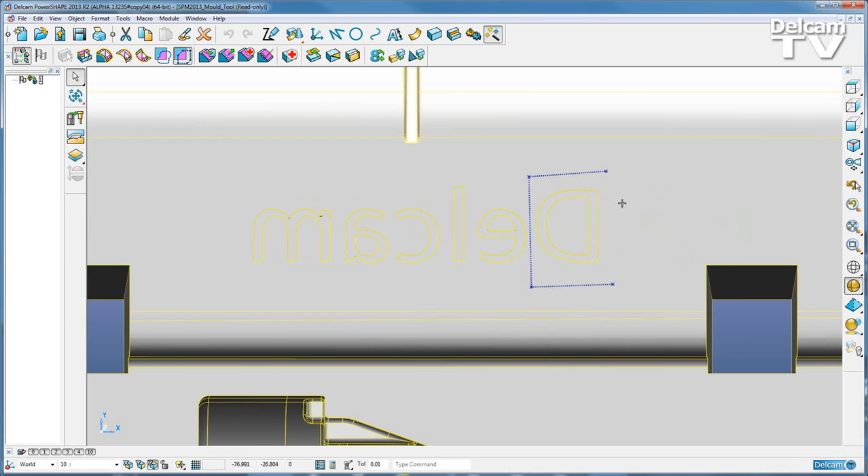In this first example, we're just going to come in and create an electrode around this single letter of a logo. Go straight into our solid core, just do a straightforward solid core capture of this.

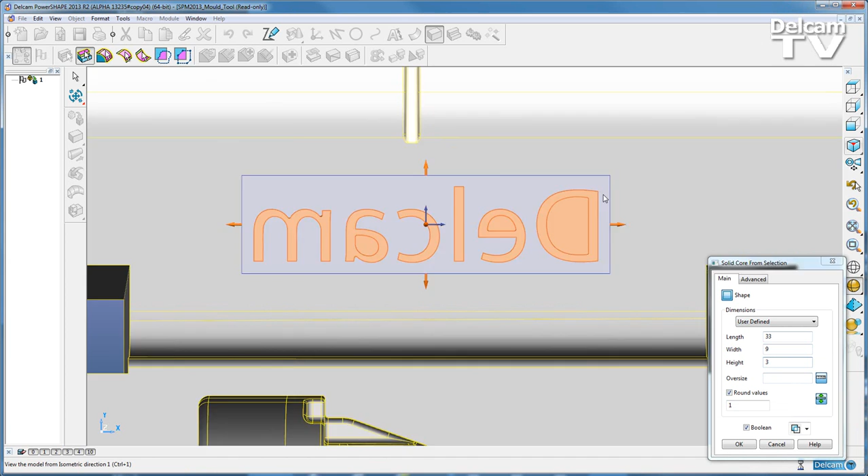But upon reflection, I can see I could probably get all these letters in. So what I can do now is just hold down the Shift key, and just add these extra letters now to this electrode. Then what we'll see is the solid core area automatically updates to include these new additional letters for this electrode. I can now come in, just do a manual alteration here, just increase the height slightly. When I select OK, what we'll see now is that whole electrode core area has been captured.

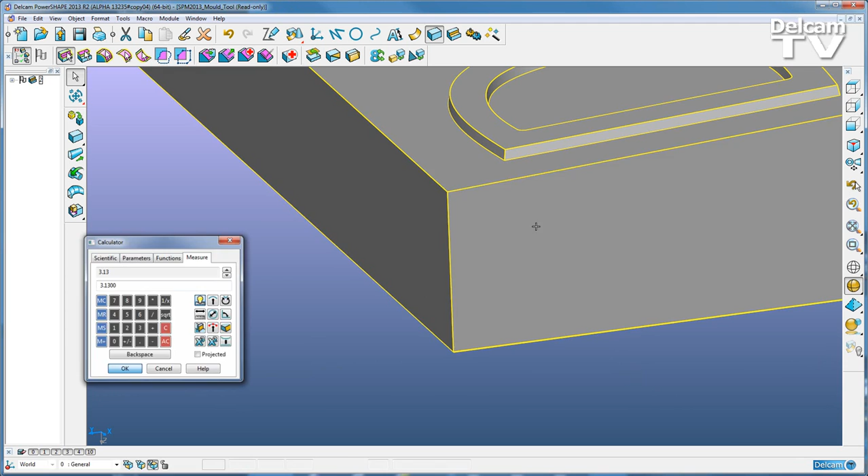I'm just going to apply some clearances to this. So I'm just going to come in now and just use some straightforward measuring tools. Just measure between these 2 points here. I can see the distance is 3.13 millimeters.

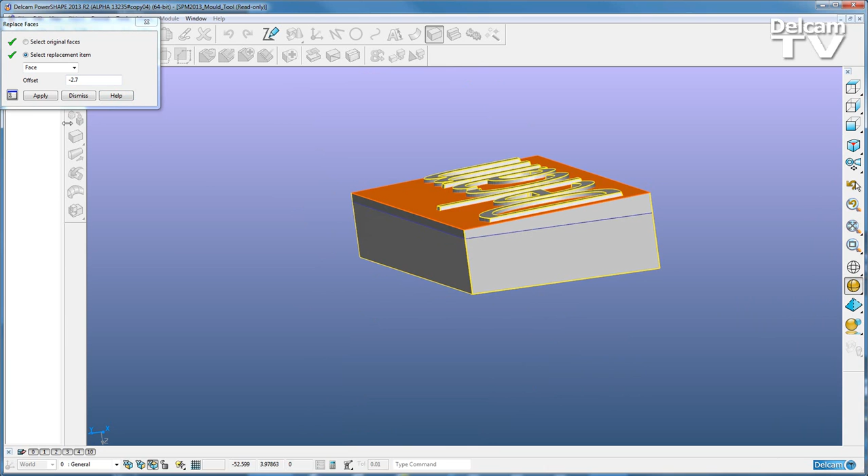So now I can just come into this electrode, just select the individual faces I require, and what I'm going to do now is just do an offset here, minus 2.7 millimeters to the bottom face. We'll see a blue outline, which is telling us where the area will be. I can tick and accept that.

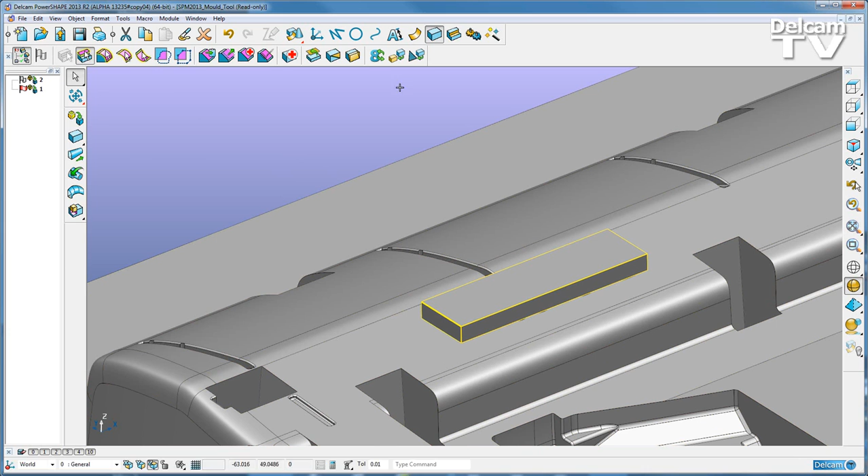This solid core now has been offset. I can turn this back into an isometric view. I can go and turn that now into my first electrode. So just make my mold tool active, select the solid core, then just go through the electrode wizard.

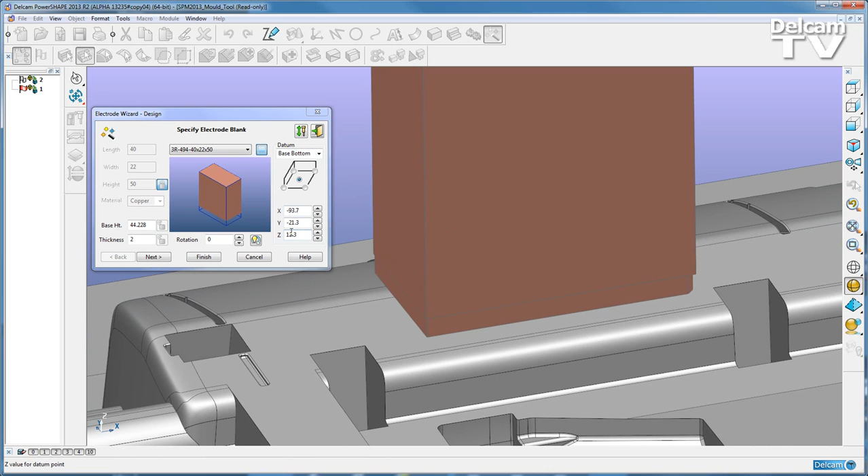I'll first of all apply a base. Now what I'll do here, I'll come from a standard 3R blank, but we can also see now we have a frame automatically applied to this electrode. We can choose a Z value here, which should set then for a value that we would require. Or I can rotate this blank around. Even at this early stage, I can extract away that electrode, have a look at the face underneath, tick OK, and go now to my next screen.

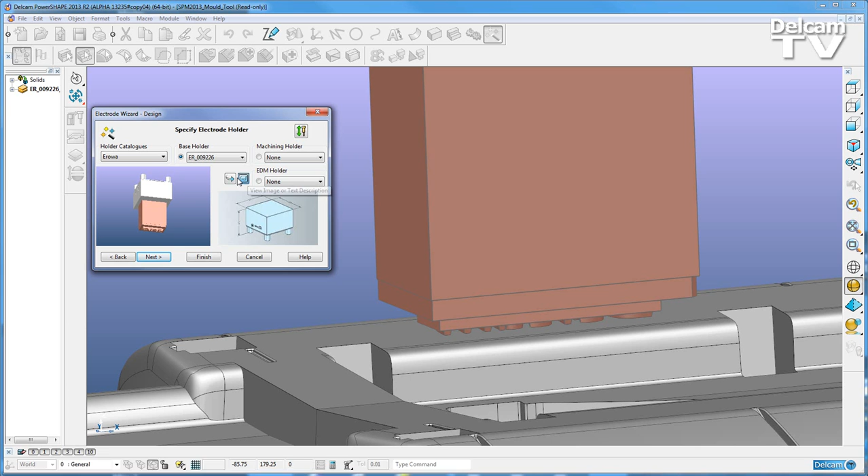I can choose an appropriate holder. In this instance, I'm going to use an Erowa holder. I can get a picture reference of what that looks like from the catalogue, or I can go back to the text description of this. I can also rotate this holder around if I so wish to put it into a more suitable orientation. But notice as we do this, this automatically updates so we can move around in the screen.

I can now set the counter for my first electrode, and I can select which style of sheets I would like to create. In this instance, it's just going to be a general assembly sheet. I'm going to create that on level 30. I can now go from a selection of undersizes, so from AGIE, Zimmer & Kreim or OPS. In this instance, I'm going to use OPS. I can use my user-defined spark gap, go to a minimum spark gaps required for this electrode, or I can use the maximum. All this from the default settings by the OEM.

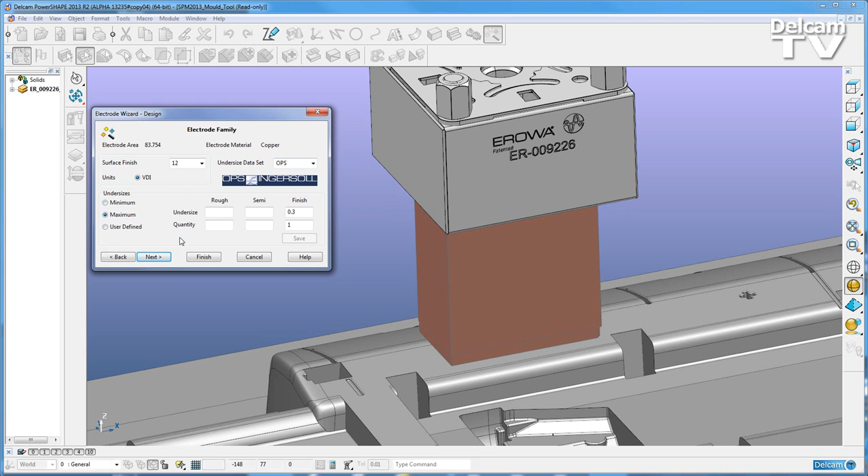In this instance, I'm not going to export anything at all. And I'm just going to click here, finish at this stage, and create my next electrode.

We can see the general assembly here. This is the customised general assembly. We can see the view shades in the bottom right hand corner. A customer logo can be applied in here. And again, with the position of this electrode on the mould tool.

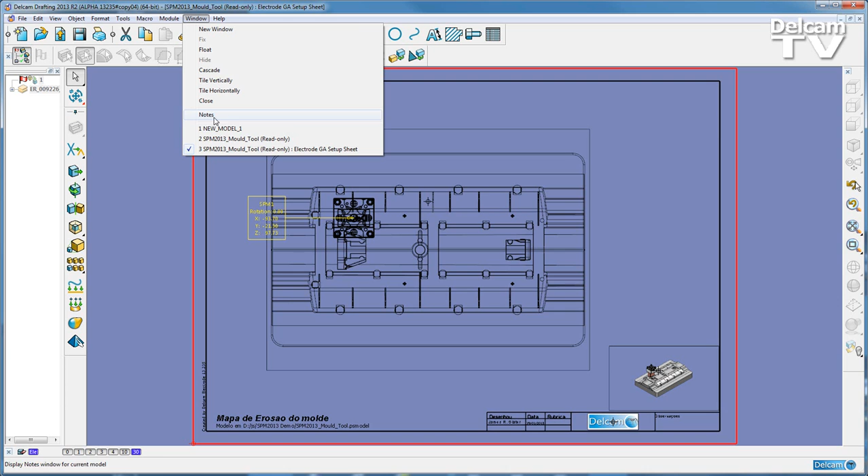The next electrode I'm going to create now is going to be for this rib area on this tool. I'm going to select that rib. I'm going to come in now. I'm just going to do a lasso selection all the way around, so I'll get the rib, plus I'll get those top radiuses that are included here in this rib area. I'll do the solid core capture.

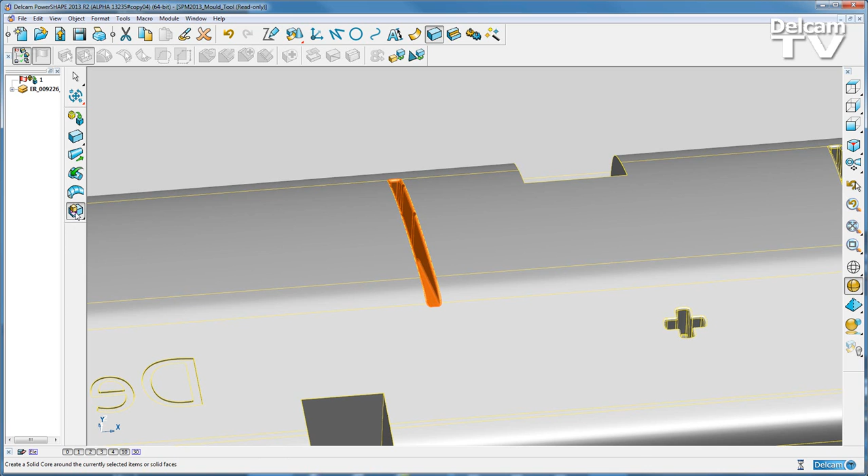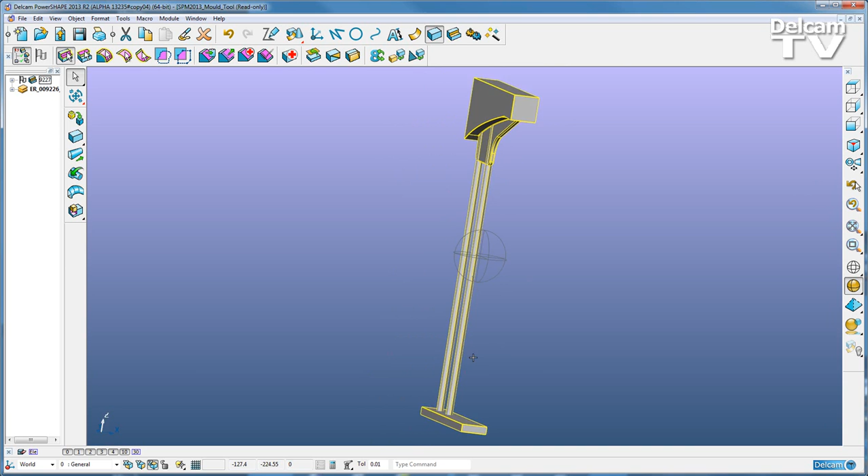Apply an offset on here of 2 millimeters. Again, I'm just going to apply now just a manual height on this, just give it a bit of depth. Having done that, we can see then we've also got these pins that have been caught in this capture, as well as the base of the mould tool.

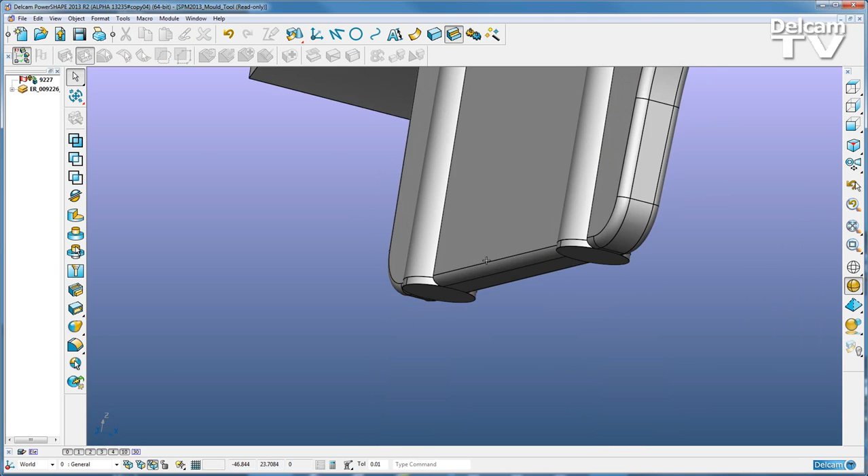We can remove this now very easily using our direct modelling tools. So in this instance, I'm just going to come in, select just this one face here, then just split that face on this electrode. Having done that, I can just delete that away. I can now come in to remove the unnecessary areas from this electrode capture.

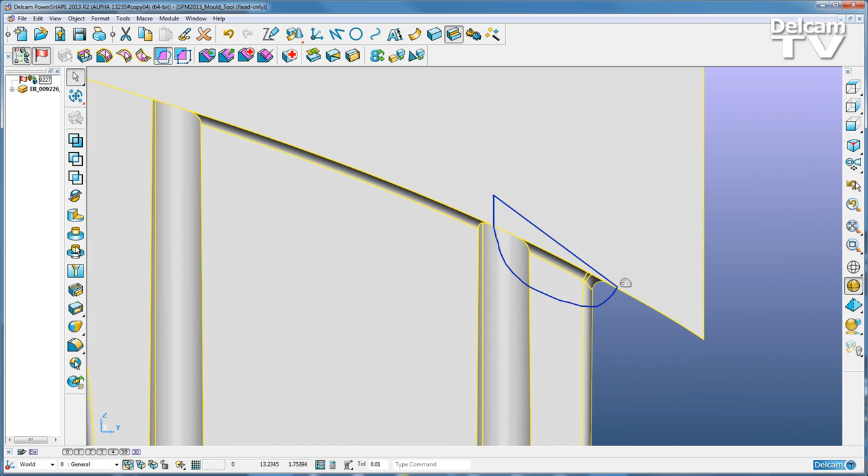Having done that, I can come in here and do that lasso select. I'm just going to do a remove and heal now, and all that's been removed. Again, I can do it for this area in here. I'm just going to move these radiuses away, automatically remove and heal. Now I'm going to do it just for the face selection on the first side.

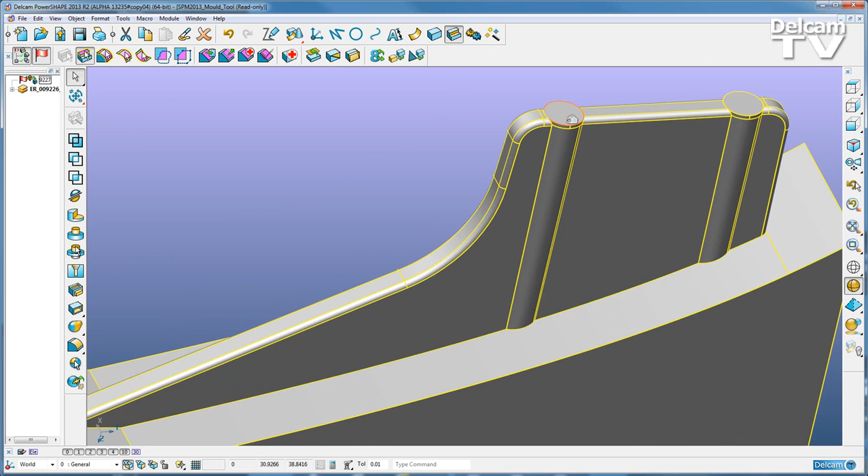And of course, I would have one radius left on the far side. Just select that, and again, just remove and heal. Select these individual faces here, the pins, so I don't require these in my electrode. With the shift key down here, I can just add all the additional faces that I require, then do the remove and heal.

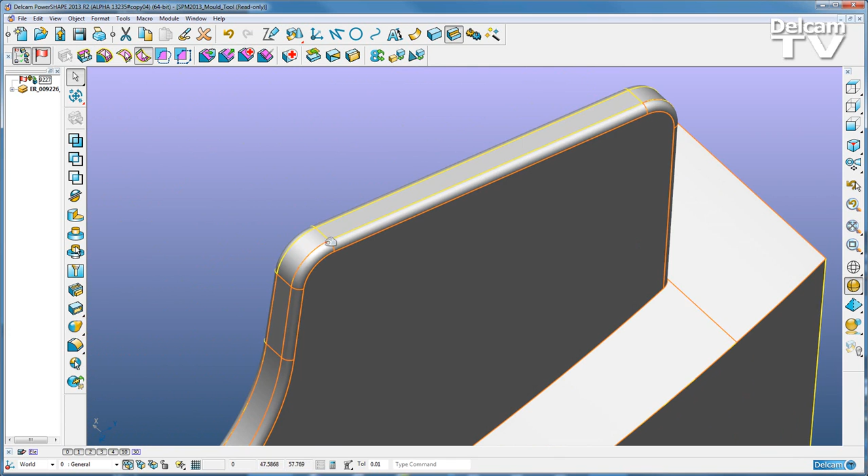We can see now that it has indeed done that, but we get these two concavity errors at the top. So what we're going to do now is come into concave selection, select the first and then the second. With the remove and heal, all the adjacent faces have been re-intersected to heal that area.

What I haven't got yet is an offset area for this whole bottom face. So what I'm going to do now is come in just for individual face selection, select those, go into my editing tools here, into my general edits, and apply an offset on here of 2 mm. We see the blue outline giving us an indication of where it's going to go.

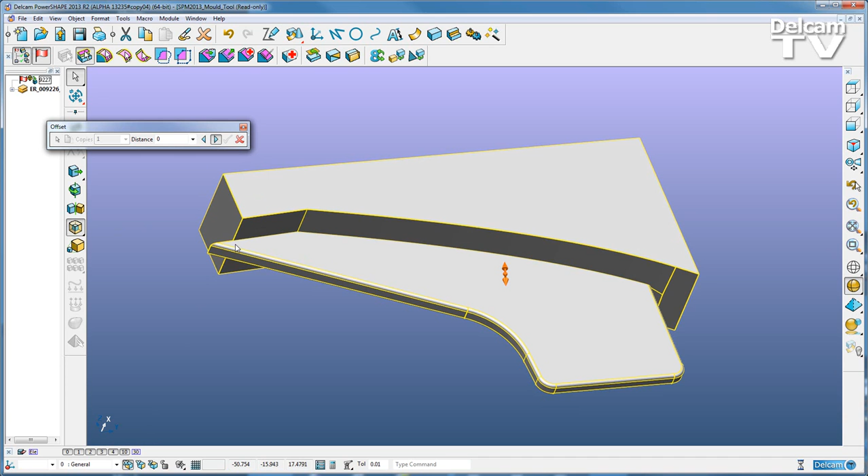I'm going to choose the next selection just to remove that extra area. I am happy with that. I can accept this. I'll come back in and have a look at my mold tool. So that ribbon's been done.

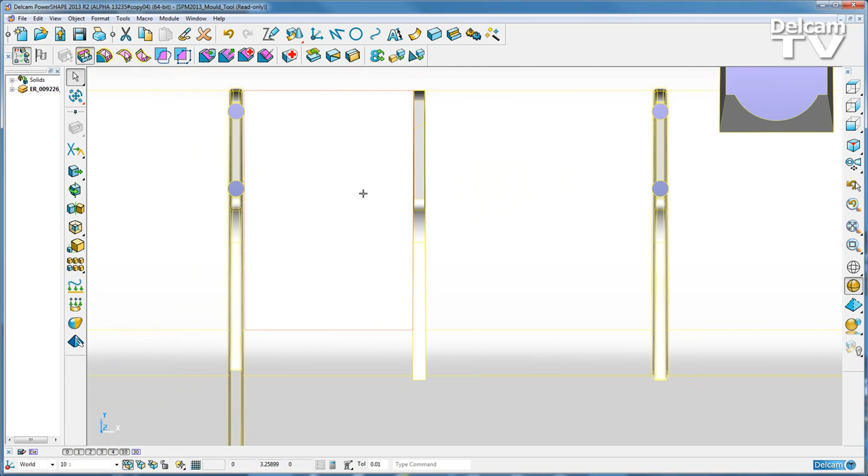What I'm going to do is look further up. I can look at my other ribs and I can see that one's different. So before I create that electrode of that core capture, I'm now going to come in and just create another core capture around that area.

This time we'll do a concave selection, just inside that area. Go to the solid core from selection. What I'm going to do now is just do that capture again, using the same settings here. I'm just going to do a 2 mm expansion.

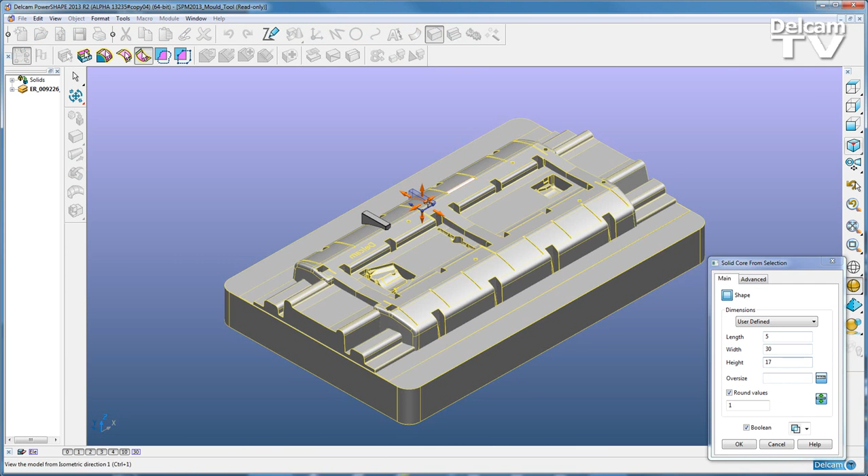I'm just going to come in and have a look, and apply a little bit of depth on here. Select that area. What I'm going to do this time is use the multiple face split. So I'm going to select the first face, the second and the third.

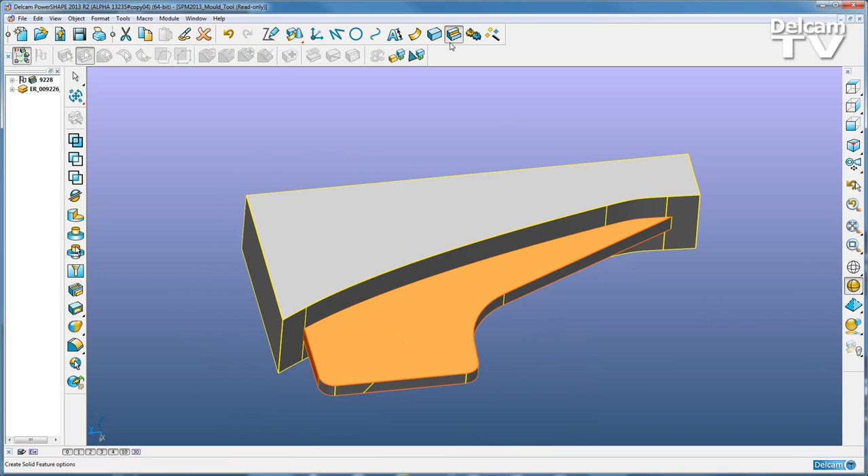Again, using exactly the same functionality as before, the split face, we'll now see that all those faces have been removed in one operation. Select this face here, just do the remove and heal, and extend straight out.

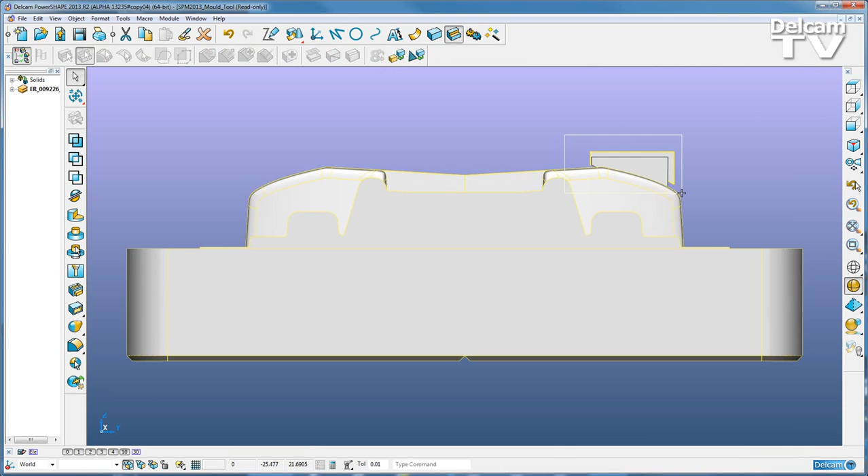We'll have a look around now, see how this is on the mold tool, and compare it to my electrode created previously. I can see here that there's a bit of a height difference, and I would like those to be the same.

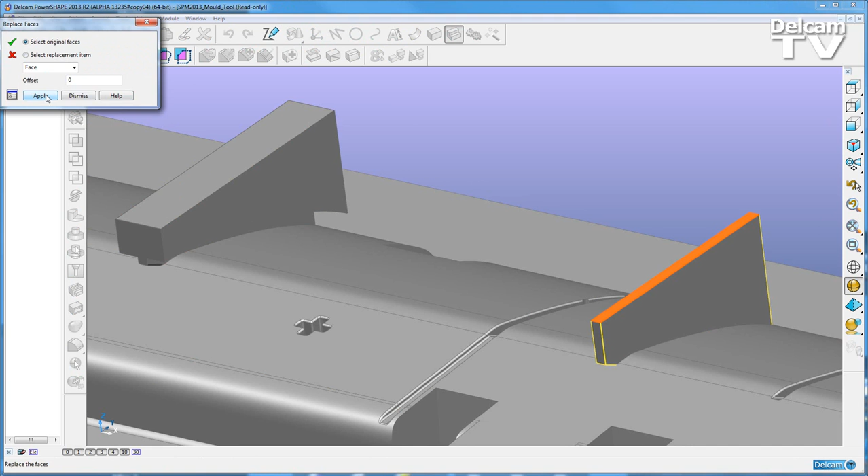So I'm just going to come in on this electrode that's going to be created from this core capture. I'm just going to select that top face, do replace face now with the face on this core capture, apply, and now in our view from the side they'll both be at the same height.

I'm just going to come now and remove that second electrode.

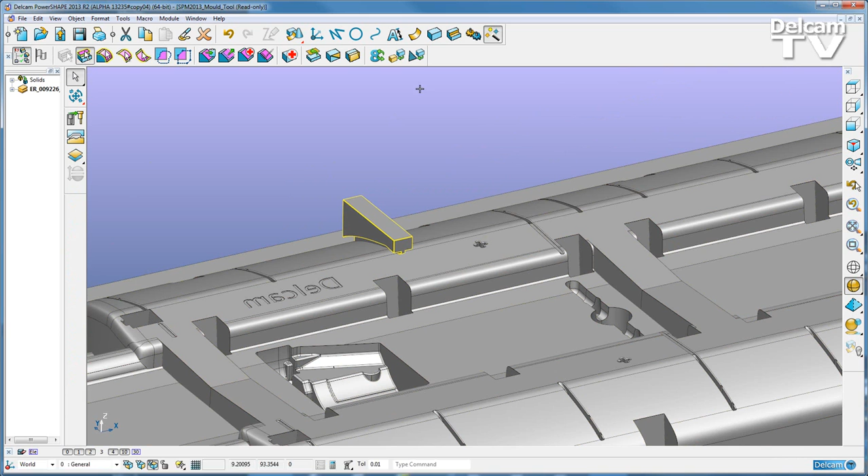I'm just going to turn this core capture now into an electrode. So with the mold tool active, select this core capture, go into the electrode wizard.

Now in this instance I'm going to use a user defined base. Increase the width here to 40 mm, just increase the height slightly to 30 mm, and let's change the length here to 10 mm.

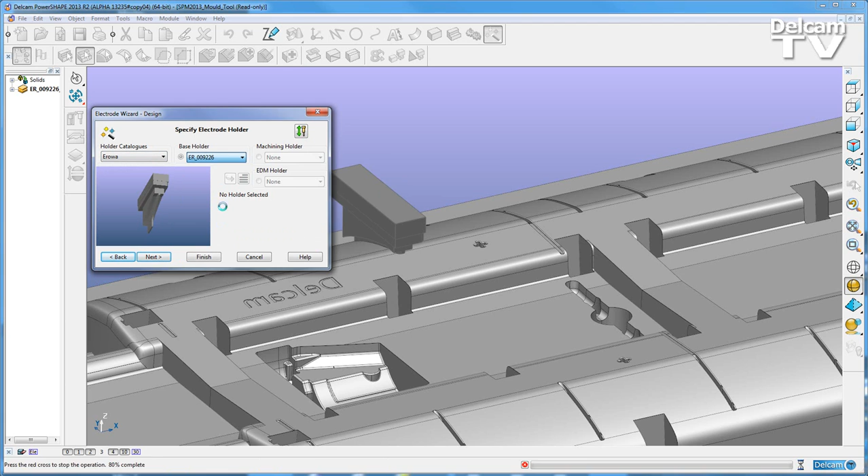You can come across. I'm going to choose now a suitable holder. Again, I'm going to use an Erowa on here. The count has automatically changed, and as so has the level.

I'm going to go in and change it to an OPS undersized dataset. Go to my next screen here and finish that. That's my second electrode here created for me. We'll see now that the general assembly sheet has been updated to include this electrode.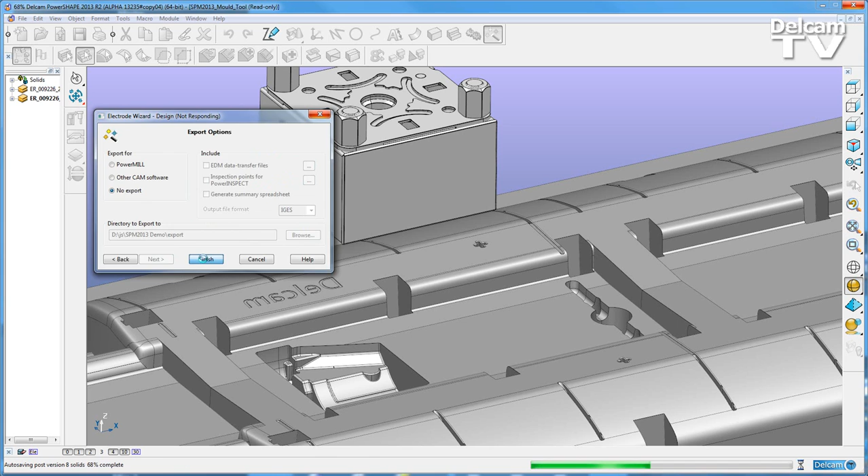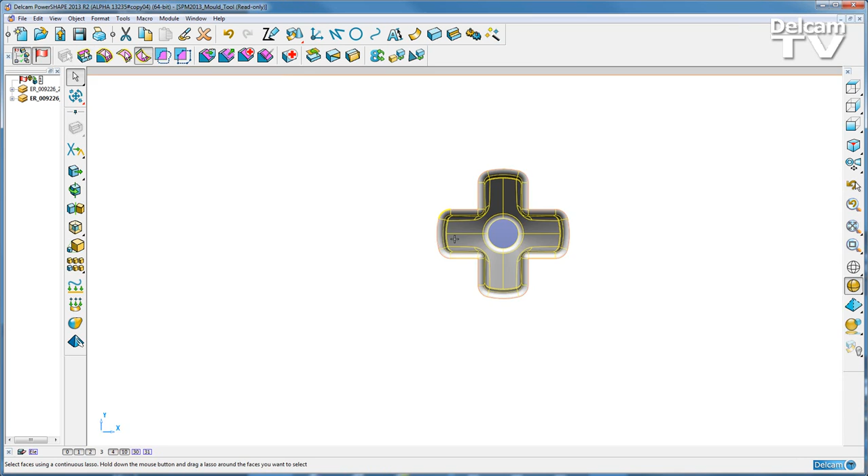On this view, I can come back now and create my third electrode. Turn this off. We're going to select in from this cross area here. So on this solid, I'm just going to do a partial selection of just this area, and come into the solid core capture.

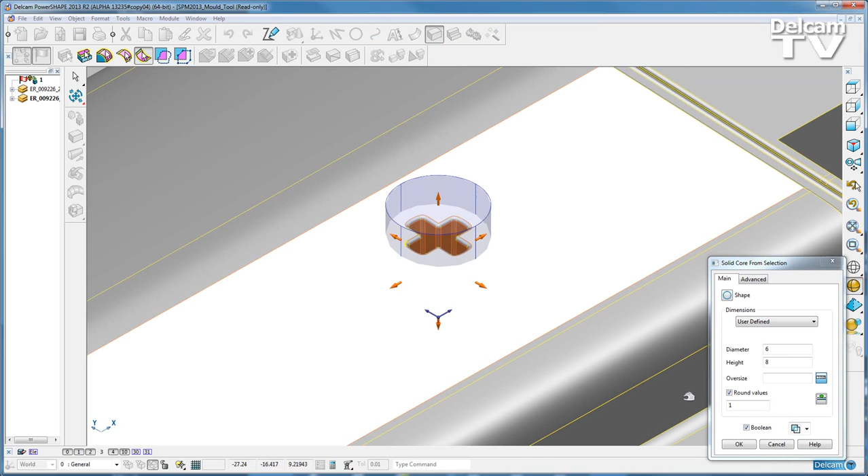Now, just by clicking here, I'm going to change this to a round shape, so I'm going to do this from a round piece of bar. Just give some height on here. Let's go OK. What we'll see now is that we've captured this core.

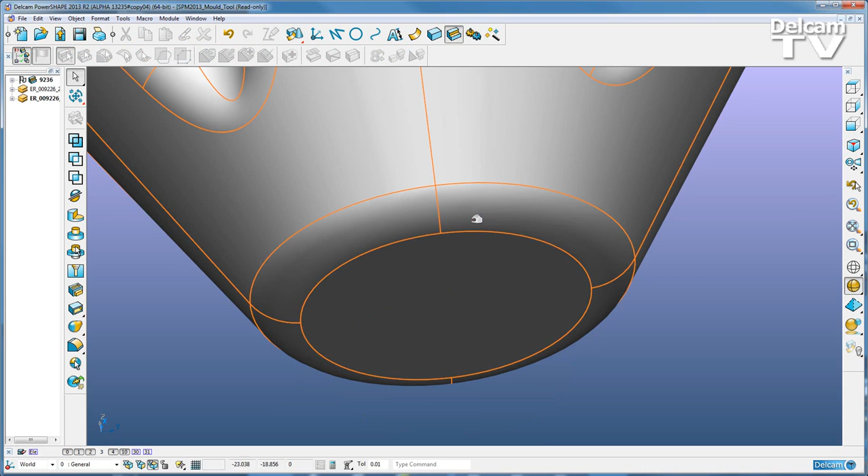We've gone inside here, and that's more than we would wish to do. So what I'm going to do is just split now this solid core capture. I'm going to select a point here, click Apply. And what we'll see now is its whole area has been split from the main solid. I'll just delete that away.

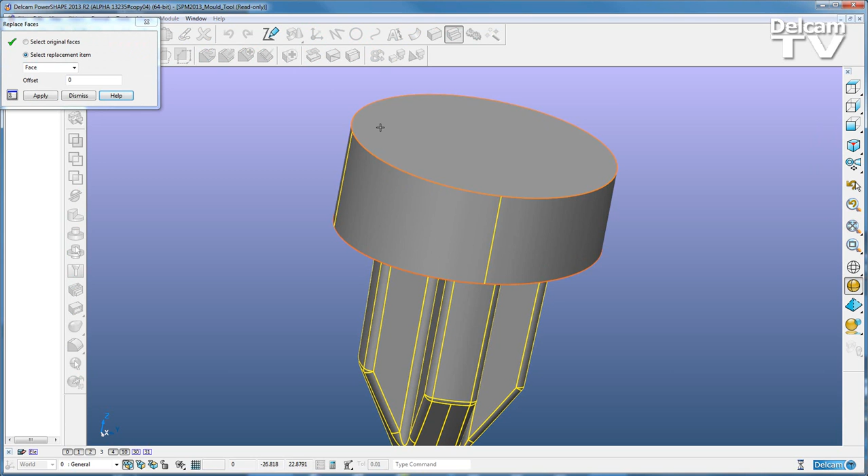Again, I can select these fillet radiuses here just by coming into this solid core capture by a lasso selection, remove and heal. Now select this face and just remove it all the way through to the base. See the outline of where it's going to go. Tick OK, we can remove that.

And now when I turn the mold tool back on, we can turn that core capture then into an electrode. So if we come to our main tool itself, again just make it active.

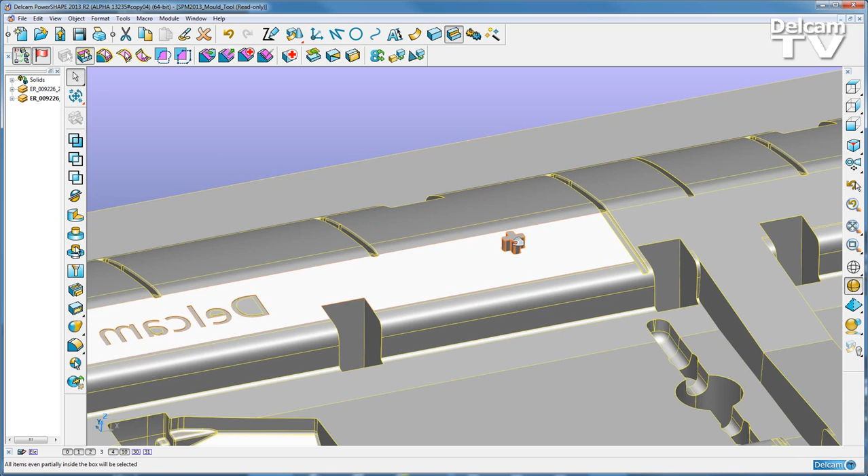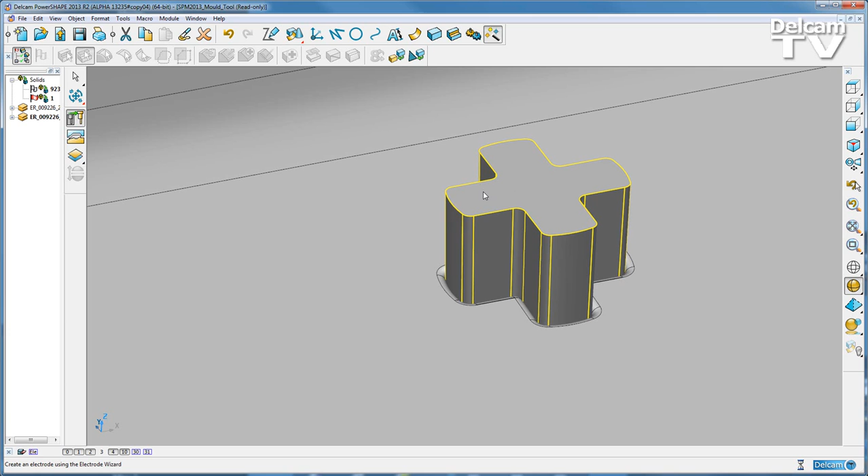Select the solid core, come into the wizard, now apply a suitable blank size to create this electrode. So you get a better view. Again, a frame has been applied to this automatically.

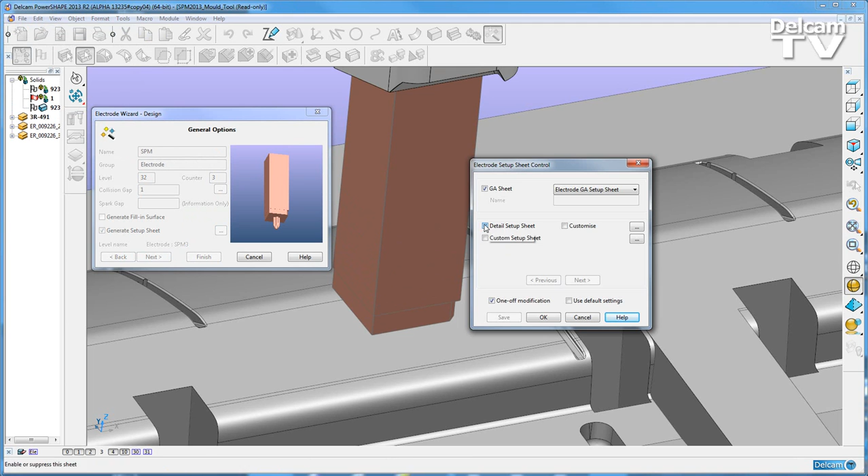There's my next screen. This time we're going to change the setup sheets that are going to be required. I'm going to create a detail and a custom setup sheet here, as well as it being applied to a general assembly sheet. I can use here my OPS spark gaps, or I can come in and use user defined, based on the similar areas that have been used previously using this electrode material.

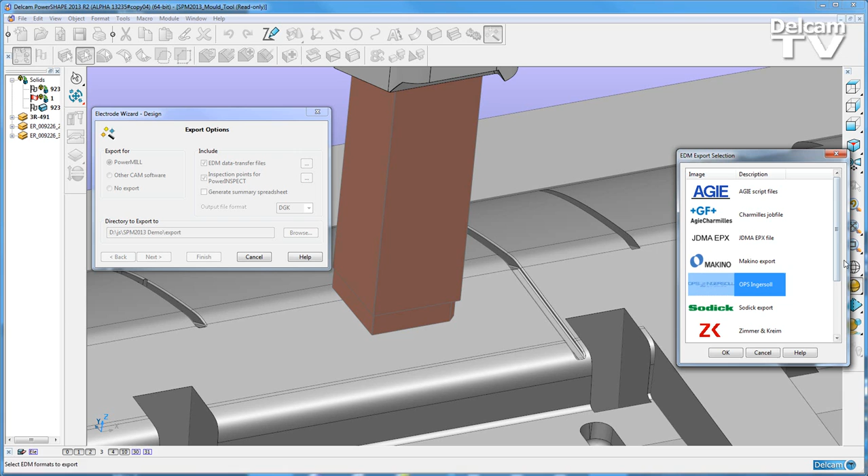Go to my next screen. Now I'm going to export this for PowerMill. What I'm going to do is create a script file to use on my spark erosion machine. We have common spark eroders here, from AGIE all the way down to the Zimmer & Kreim, Mitsubishi's. In this instance I've used OPS information, so I'm going to use an OPS script file.

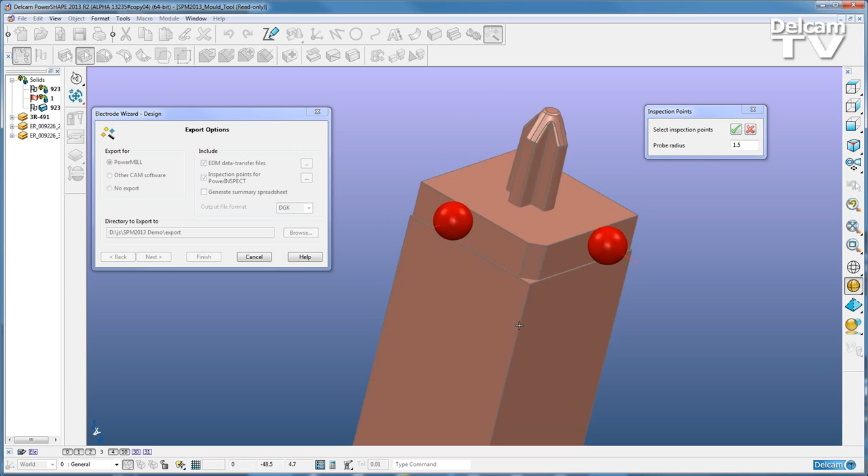I'm going to create some inspection points now on this electrode, so I can change the probe radius to suit the size of the electrode. In this instance it's correct at 1.5 millimeters. Now first of all, I'm just going to apply some inspection points which I'll use later in PowerINSPECT to check the position of the electrode.

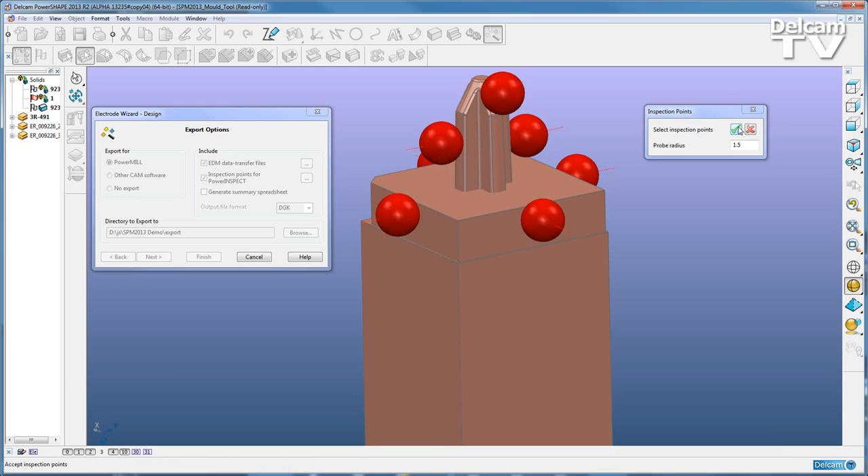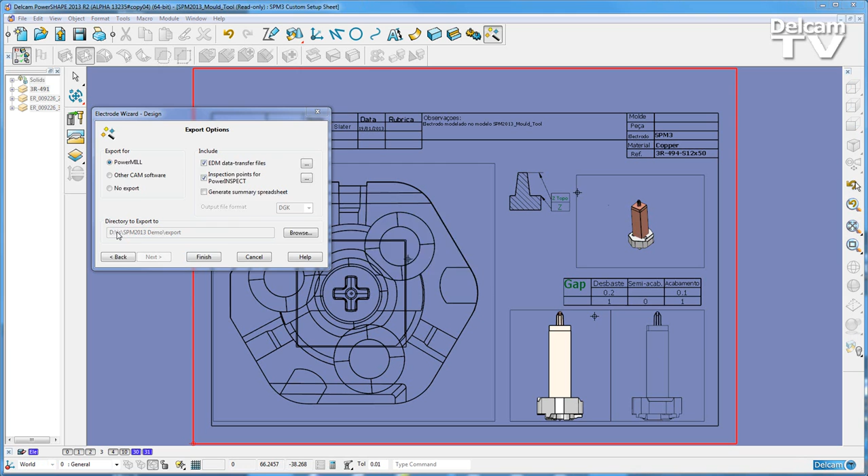I'll select No, go into each of my individual sheets. Again, we can put customer logos, customer details. All this is fully customizable within PowerShape. The positional information for the electrodes is shown.

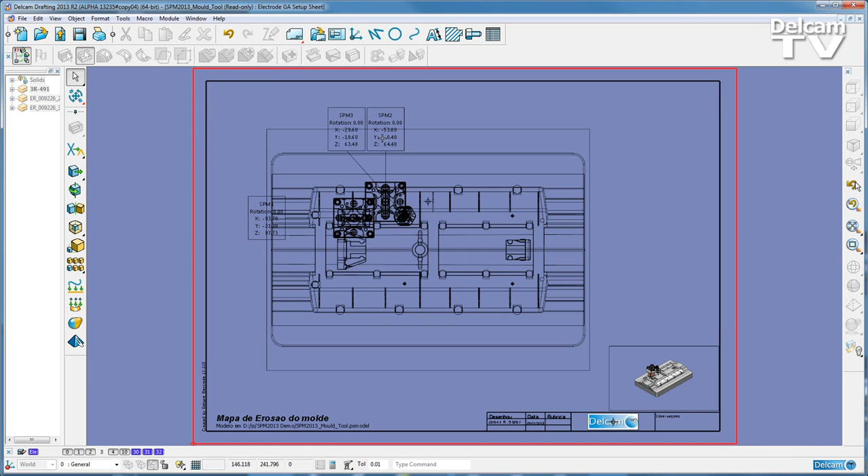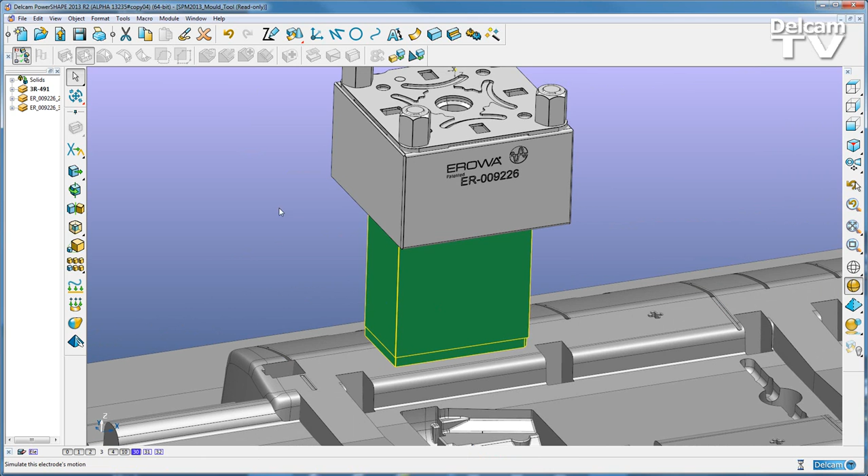I can come back to my mold tool. Now in this instance, if I just turn on one electrode, I can go onto burn area shading. I can then do a simulation of this electrode and recognise all the burn areas. I can move this away, and in doing so we can see the red areas of the burn, the yellow before it starts to become clear, and green for the material block itself.

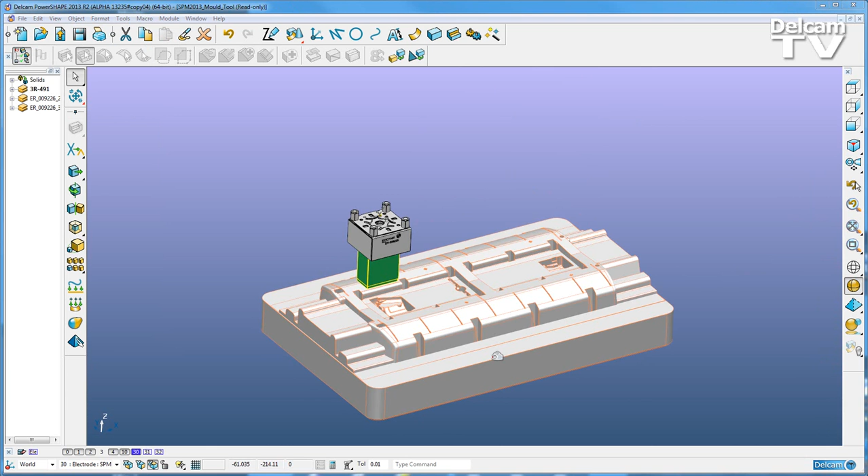We can now look at the script file that's been produced here for this OPS control. Go into my notepad. We can see now that for each of these individual electrodes, we have the undersizes, the name of the electrode, plus the depth, the areas and the material, as well as the surface finish required on that electrode. This together with the positional information.

The single trode file has been created for us, which we can now go and use in PowerMill and in Power Inspect.

We are now going to extract an electrode from the trode file that we just created in PowerShape. We have the names of the electrodes there, together with a screen capture of the electrode itself. We're now going to give the electrode an appropriate name.

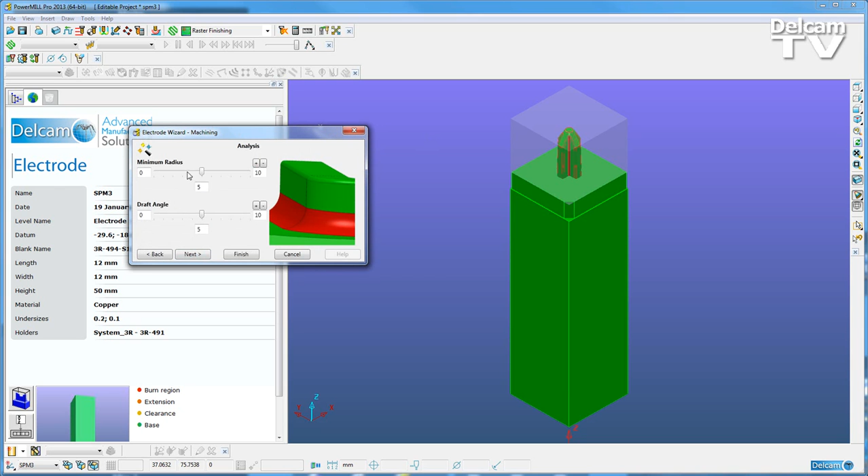We can create the material block automatically from information that was defined in PowerShape. We can then come in, have a look and analyse this visually, interactively and very quickly.

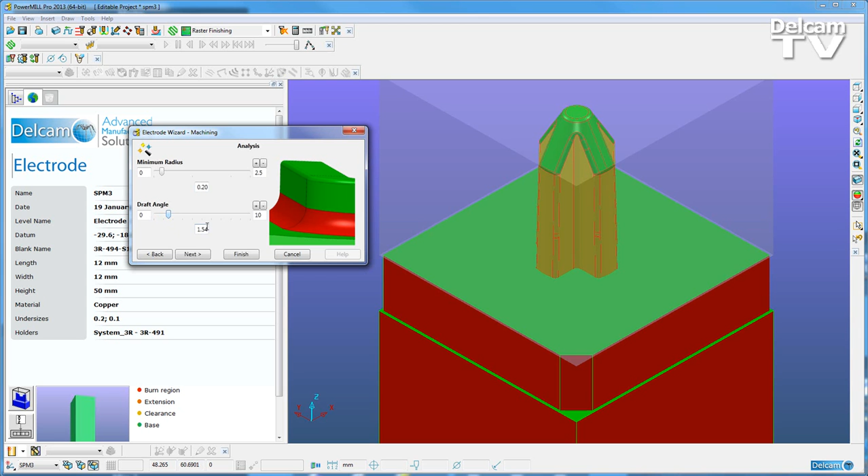You can soon see there's a radius in there of around 0.2 millimeters, and I can see it's 0.2 millimeters there. I can engage with all the measuring functionality of PowerMill at this stage. Have a look at the draft angle - I can see on this electrode it's 1.5 degrees or less.

I can import any additional tooling here, so the tooling templates that were saved - these can be the carousel of the machine, or these could be the kind of parts we use per customer. In this instance I don't wish any additional tooling, so I can just click next to go through.

From predefined toolpath templates that we have created, we have an image that's stored with these to give us representation of the kind of work they're used for. We also have the spark gaps automatically loaded into this undersize area.

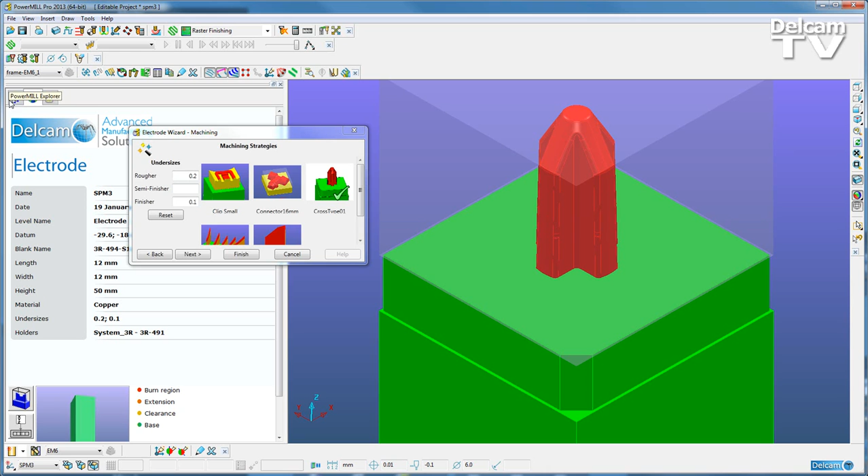What we'll see then in PowerMill is that this information has been imported, and the toolpaths have come in into individual folders. The folders are named the same as the electrode, with a description of how they're going to be used, together with the undersize information. The templates are brought into each folder.

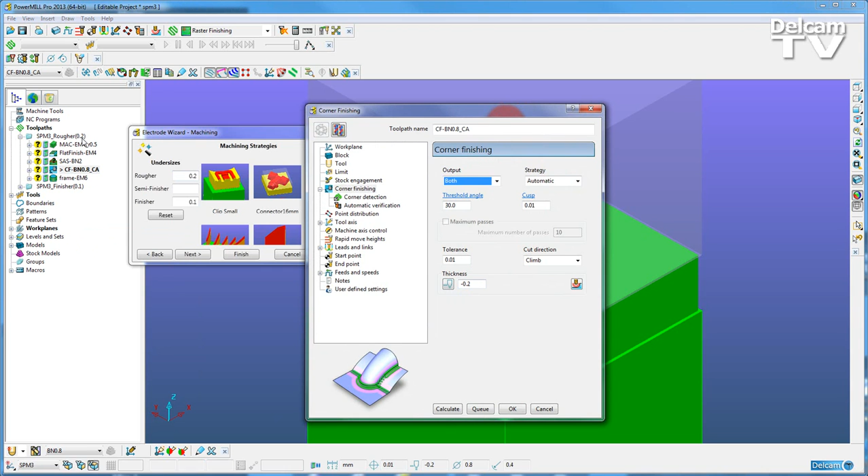However, each template will have these undersizes automatically applied. So in this instance we can see on this toolpath a 0.2 millimeters negative thickness. The 0.2 millimeters undersize in this folder has been applied automatically for us.

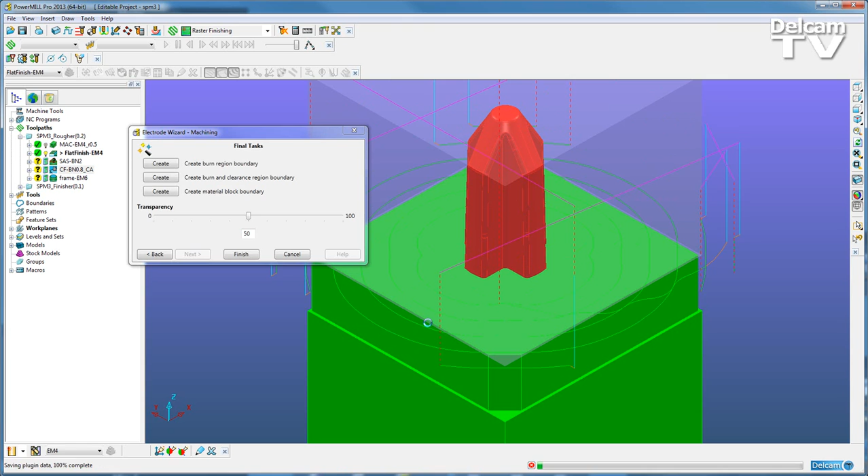By going through to my next screen now, when I click finish, all these toolpaths will be calculated for us automatically - so for the model area clearance, flat finish, an automatic steep and shallow toolpath, a corner finish to pick out these tight corners in here, together with a frame. Now frame toolpaths begin with the word frame, so when the processing is done, the system then knows not to apply any thicknesses to this region when it is machined.

Now we'll see, using the PowerMill functionality, these toolpaths have automatically verified as they go along, giving us that green tick so we can ensure that these toolpaths are indeed safe and ready to run. What we've seen up here now is that the plus has been applied to these NC programs, because as each of these programs are calculated, they're also added to the NC program of that whole folder.

So as this calculation is done for the first electrode here, we can go along and have a look at Power Inspect and how that uses the trode file.

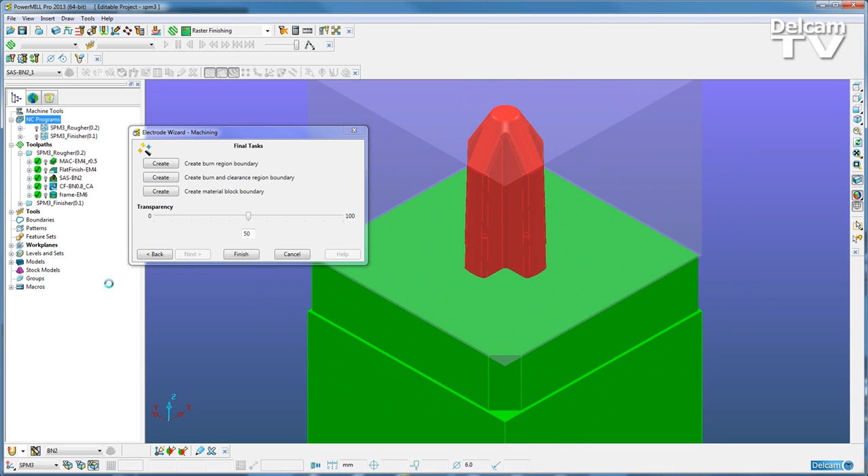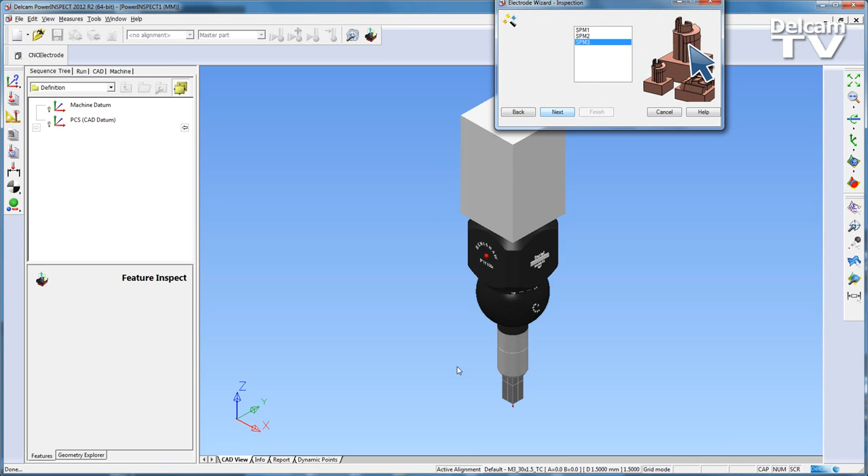Using the CNC Electrode, we're now going to extract from the trode file the SPM3 electrode here. This has been imported to us into Power Inspect using the electrode blank sizes and the undersize information. Then move the probe away from this electrode.

We'll zoom in, select our finisher points, so we'll get the frame and point information that's on the electrode, together with the undersize information.

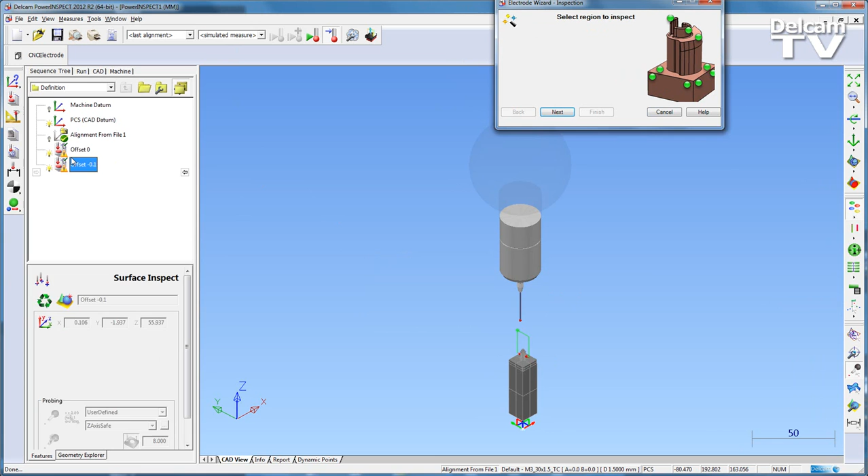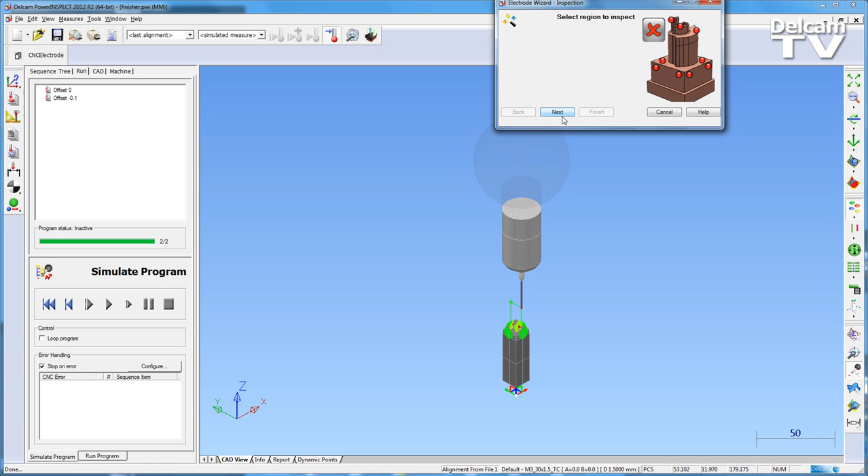We can now go through - we can do additional inspection requirements if we so wish. If not, we can go straight through now and have a look at the results of this electrode for us. These will be presented to us in our inspection report.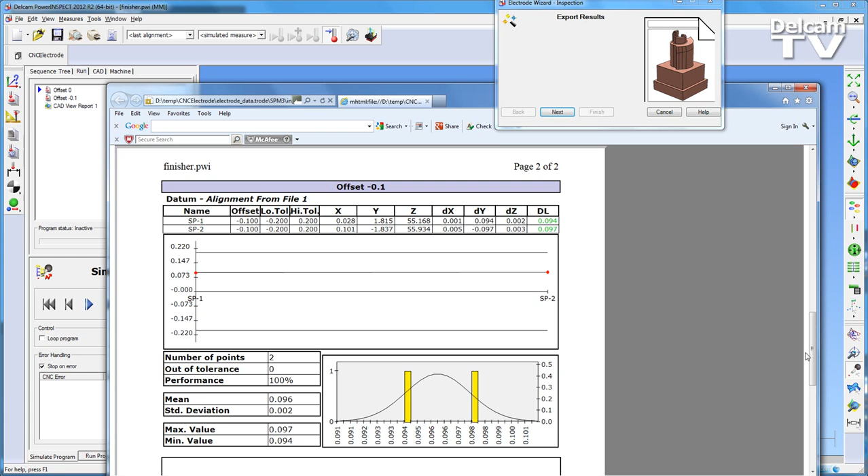All the customised information can be included in the top here. The full PowerInspect functionality is available. Linear deviations, all shown to be within tolerance and perfectly acceptable. When we click next now and finish, all this information is then written out back into the trode file.

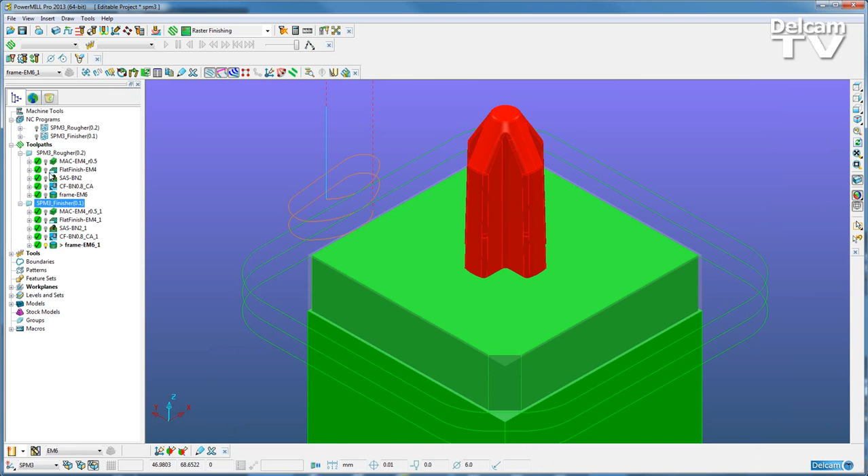We can now go back into PowerMill and have a look at our calculated toolpaths. We'll see here in PowerMill all these toolpaths have been calculated for us - so for the model area clearance, the flat finishing toolpath to come to the bottom of this electrode, the automatic steep and shallow, the corner finishing in here, together with the frame itself.

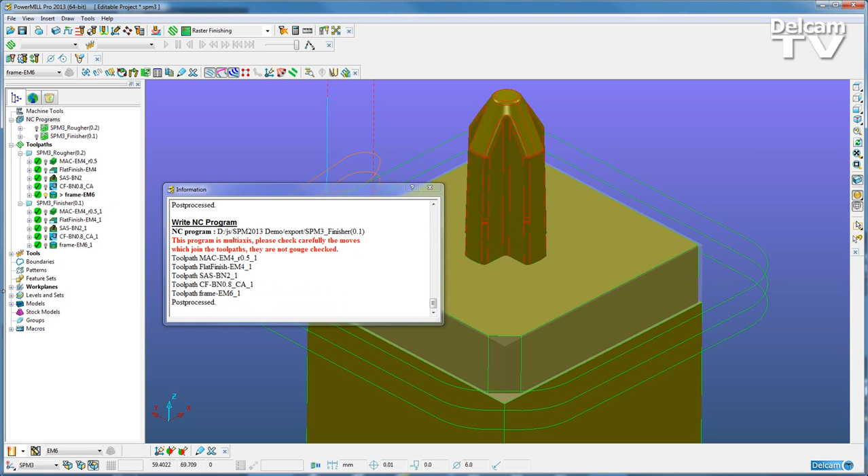These are then applied to the NC programs, where we can write this information out. We can have a look at the NC program data that's being produced in Notepad and see all the code is produced.

So what we have seen now is that we've created the automatic script files in PowerShape, we've automatically created the NC programs to run on the machine tool, and we've created the probe path inspection reports in PowerInspect - all done using the new Delcam Electrode solution.